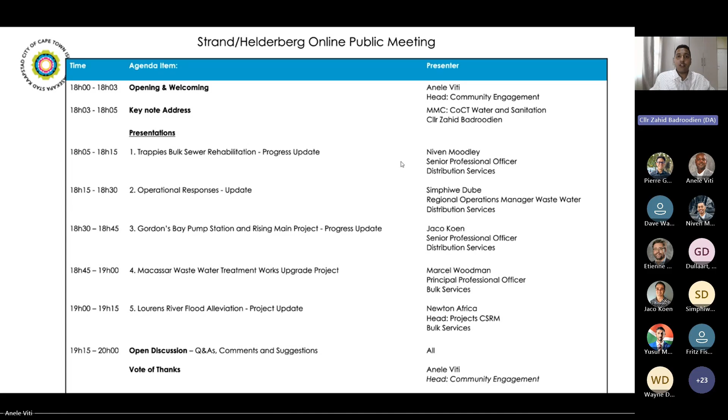Thank you, Councillor, thank you so much for that. If I may hand over now to Niven to present the first item. Niven, I will navigate the presentation from my side, you must just tell me when to move on to the next slide. You may take the floor. Over to you, Niven. Thank you, Anele. Anele, if I can just take control from my side, then I can navigate and don't have to keep asking you to skip slides. No problem, Niven, you can do so. Sure, can you please take us through to the presentation, or put it in presentation mode? Perfect.

Good afternoon, everyone. My name is Niven Moodley. I'm a senior professional officer in the Distribution Services Department. I am the project manager for the Trappies bulk sewer rehabilitation, and tonight I'll be providing you with a project progress update on this particular program.

For those who are not familiar, this is the overview of the Trappies line. It is the DN 900 line, a 900 millimeter diameter line that runs from the corner of De Villiers and De Villiers Street and Main Road, traverses down Bear Street, crosses Fagan Street and the Lourens River, and all the way down to the Lourens River pump station. We are in the process of rehabilitating this line due to the historical collapses that have occurred in past years.

Just for some further context and a project overview: the aim of this project is to emphasize that the Trappies bulk sewer is currently 50 years old as of 2025. The aim is to extend the lifespan of the pipeline for another 50 years and to restore the structural integrity of this bulk sewer to prevent future collapses along the line.

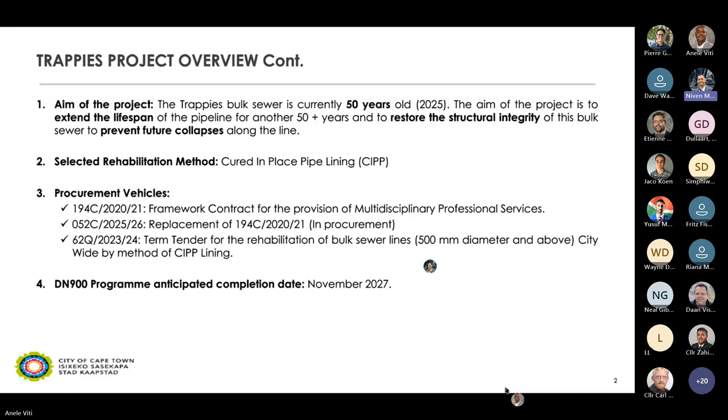In terms of overall progress to date, our professional services provider managing the construction was appointed for 7.3 million, and to date they have spent approximately 5.1 million.

We have 3 works projects. Works Project 1, initially valued at 32.2 million, has since spent 30.9 million. Works Project 2, valued at 34.5 million, has spent 10.6 million to date. Works Project 3, the latest, started this year at 34.6 million, with no expenditure to date, expected to ramp up as the months go by.

The upcoming appointments, or remaining works projects envisaged for complete rehabilitation of the sewer pipeline, will be Works Projects 4, 5, and possibly 6.

Okay Anele, I'm trying to change the slide. It's not moving.

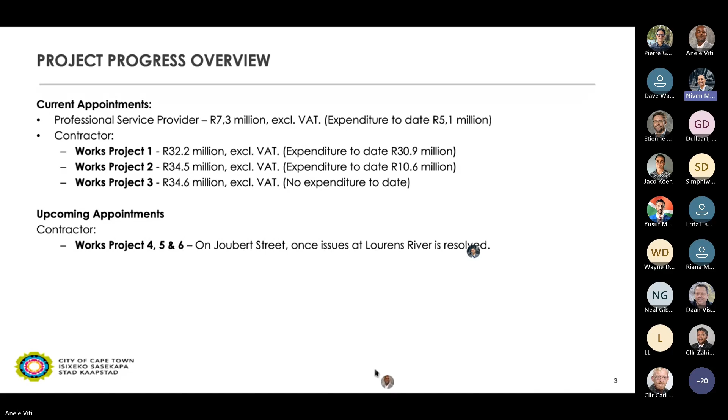Moving on to project progress, focusing specifically on Works Project 1. We last reported in December that lining was complete and the contractor had minor reinstatement works left for January 2026. I can confirm this has all been completed and De Villiers Street has been reopened. The completion date for this works project was the 21st of January 2026.

Anele, I'm not sure how we got to Works Project 2. If we can go back a few slides. Yeah, one more. Yeah, this is it.

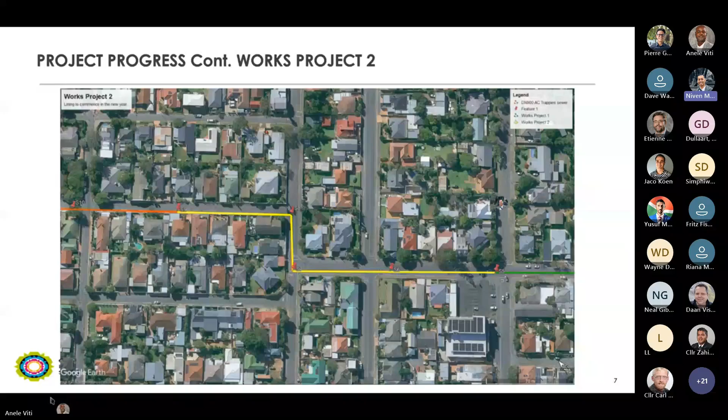Moving on to Works Project 2, which covers manholes S5 to S9, highlighted in yellow on this slide. It runs from the OK supermarket down the remainder of De Villiers Street, up Munich Street, until the beginning of Helderberg Street. I'll go on to the overview in terms of progress on Works Project 2.

The due completion date for this works project is 16th of May 2026. The contractor is making relatively good progress, primarily due to the absence of any failures on the existing pipeline, as opposed to the 4 failures we had on Works Project 1.

Works completed to date include the design and order of the CIPP liner, manufacture of the liner, and installation of the overpumping pipes in the roadway, specifically at Helderberg Street. We received delivery of the liner on December 11th last year. The contractor, upon his return, has since set up his temporary overpumping, isolated the pipeline between manholes 5 and 9, and done his pre-cleaning, CCTV inspections and profiling.

On the 10th and 12th of February respectively, the contractor completed the lining from manholes S5 to S6 and manholes S6 to S7. This is 50% completion of lining on this works project, and marks the milestone of the entire De Villiers Street being lined 100%.

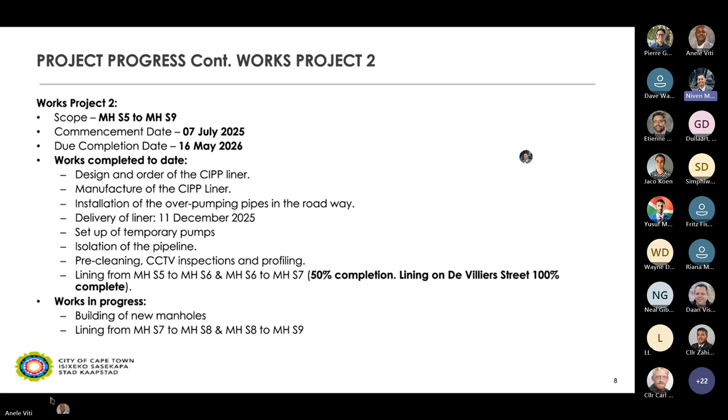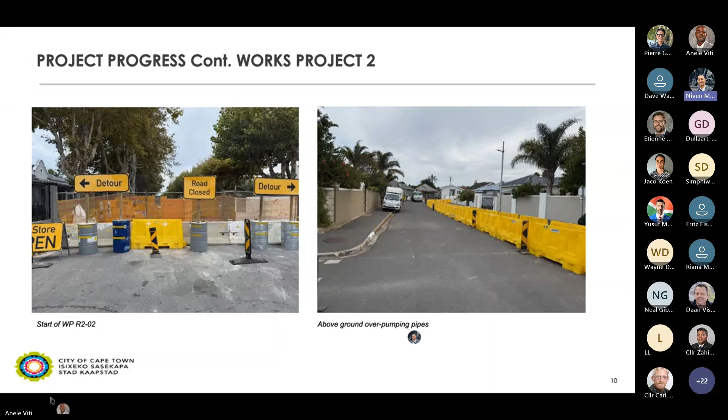The next picture here is the start of Works Project 2 on De Villiers Street. And then the picture after that is the above ground overpumping pipes that have been barricaded using New Jersey barriers on De Villiers Street.

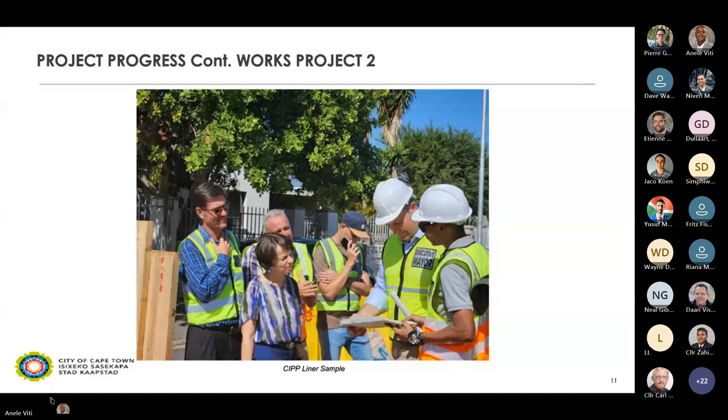Okay, moving on to Works Project 3. We did go into detail on the particulars of the challenges at the Lourens River in the previous community meeting. For those who weren't there, there's an alignment issue on a new bypass pipeline that was constructed in between 2022 and 2023, which has contributed to a lot of the surcharges and challenges we've been having upstream of Trappies.

As a result, we've shifted focus down to this particular area to remedy these issues so that when we do come back and finish Joubert Street, we're not going to have a lot of issues in terms of surcharges and spillages. So the city has initiated this project in January this year, as promised in the December meeting last year. We did get all the required emergency environmental approvals, and the contractor is currently on site. He has been appointed as of the 4th of February, basically at the beginning of this month.

Okay, so I've basically covered most of this already. Just to note that the due completion date for this works project is November 2026. That is worst case scenario. Best case scenario will be a lot sooner than that.

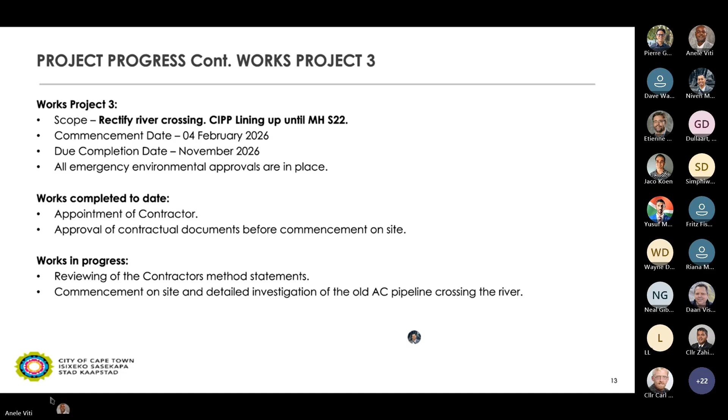Okay, this is basically a progress overview. The green section is Works Project 1, which has been completed. The balance of that between manhole S5 and S7 has been completed. So that first section of yellow and the entire green has been completed. The contractor now has to finalize his CIPP work from S7 to S9. That will be done by April, best case scenario, and May, ideal case.

And subsequently, or concurrently, we are working in the magenta area at the Lourens River to remedy the issues underneath the river so that we can promote better flow in the Trappies line and minimize any sewer spills and surcharges.

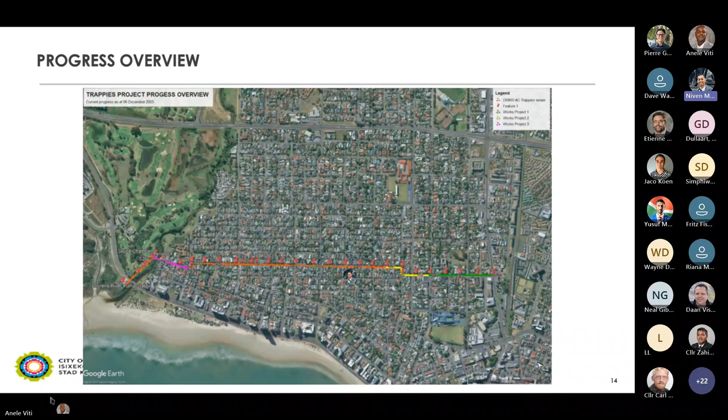Once we do rectify the issues at the Lourens River, we will then initiate Works Project 4, which will start from manhole S9, proceeding along Joubert Street, and we will put out works projects sequentially thereafter.

Okay, then moving on to general considerations. These works projects will not address the resurfacing of De Villiers Street and Joubert Street in its entirety. The contractor will only reinstate sections of the road that was affected during the works. To date, we have completed 530 meters out of the total 2,300 meters.

Challenges in terms of the surcharges along the line are anticipated to subside once the crossing at the Lourens River is reinstated under Works Project 3. Notices to residents have been issued to affected residents with the particulars of the overpumping on Works Project 2 and 3. We have reissued notices in January for Works Project 2, and we've recently issued notices just informing on the project for Works Project 3. Further notice will be issued once the contractor is fully established on site and he starts with his overpumping.

Then moving on to point E, as we progress with the third project, more sections of the pipeline will be thoroughly cleaned, where built-up silt and debris will be completely removed. This will gain back the original capacity of the pipe, which was lost over time. And then lastly, the contractor will return to complete Joubert Street once the issues at the Lourens River crossing are remedied.

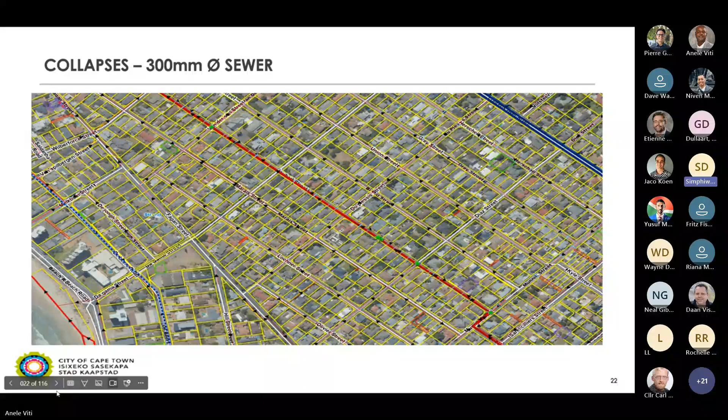On this slide we once again remind residents of the 4 collapses that had been completed by the time of our previous engagement: the collapse at 22 Joubert, the 2 collapses at number 32, and the one at number 78 Joubert. There was one outstanding repair at the corner of Munnik and Joubert Streets, which we committed to complete during the festive period. The photo on the slide was taken during the construction activities, and more photos will follow in the following slides.

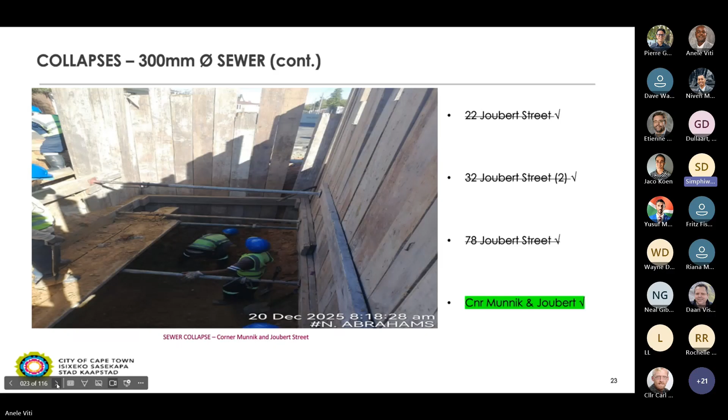These are 2 additional images showing, on the left, the completed reinstatement that was in progress once the pipeline was fixed, and on the right, an indication of the shoring work constructed by the contractor.

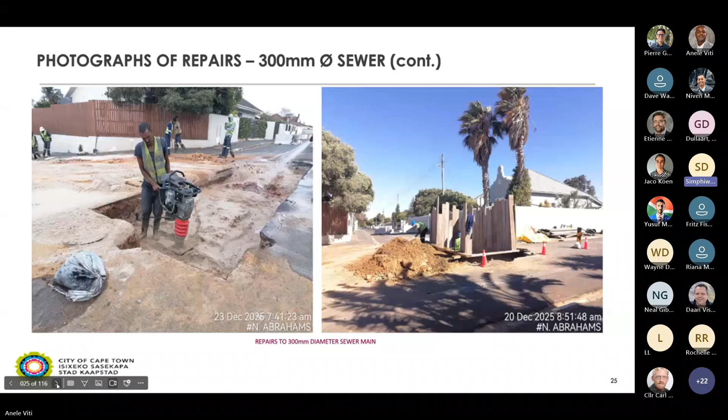This section of the presentation will focus on the capital rehabilitation works projects awarded in the Strand area, because one of the commitments we undertook in the previous engagement was to look at rehabilitating the local sewers draining into the Trappies bulk sewer line. We've been able to fast track the implementation of these projects, and the next few slides will show the awarded capital projects within the Strand area around the Trappies bulk sewer line.

4 works projects have been awarded to a contractor that will be commencing over the next 2 to 3 weeks on site, currently complying with contractual requirements and getting documentation in order. The first works project will rehabilitate 1,200 meters of the 150 millimeter diameter sewers around the Trappies bulk sewer line, and most importantly will address the 300 millimeter diameter sewer line I referred to earlier, where we had quite a few collapses between June and December last year. A total of 3 kilometers will be rehabilitated with an investment of 6.4 million rand. I'll make reference to the streets as we present the layout of the project.

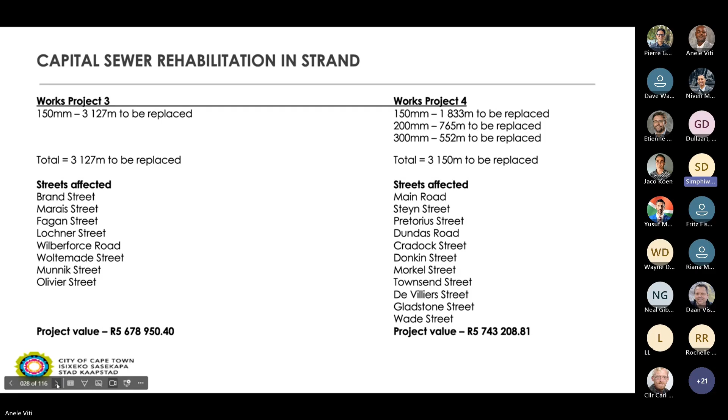Works project 3 looks at rehabilitating the 150s, or the local network, around the bulk sewer line with an investment of 5.6 million rand. Lastly, works project 4 will rehabilitate the section of 300 millimeter diameter sewer line running on De Villiers Street, closing the loop of the 300 millimeter diameter sewer, with an investment of 5.7 million rand. Now we're going to the layouts of the sewers that will be rehabilitated.

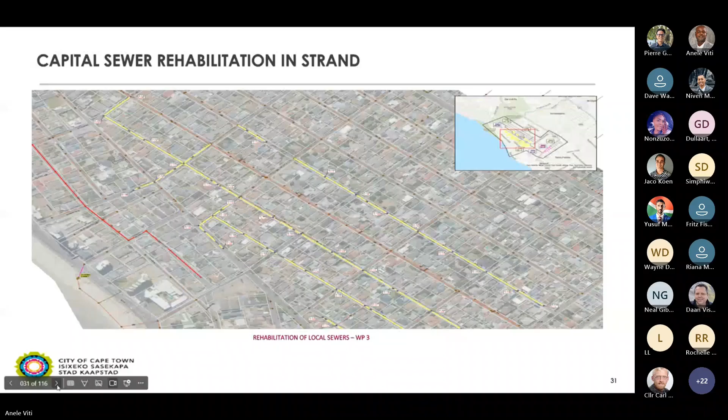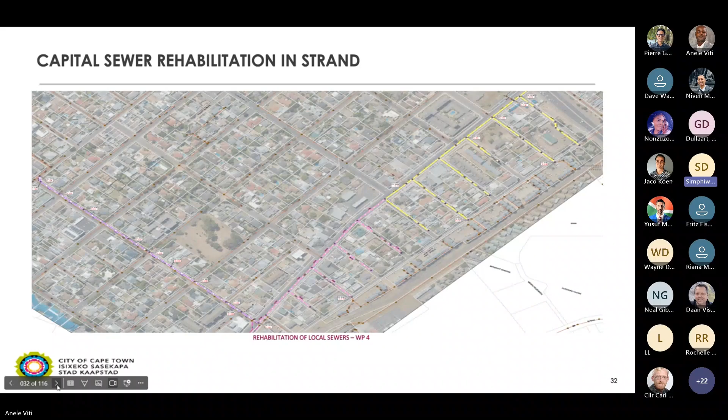The last layout shows Works Project 4. Most importantly, with this project we will be closing the loop by rehabilitating the 300 millimeter diameter sewer in De Villiers Street specifically. We'll also rehabilitate the 150 millimeter diameter sewers indicated in yellow in the top right corner, and toward the middle of the slide, the 200 millimeter diameter sewers that will be rehabilitated. Lastly, the purple line indicates the 300 millimeter diameter sewer that will be rehabilitated as well.

Next, I'll indicate the planned capital sewer rehabilitation projects section. The previous section covered the awarded projects; this section covers the planned projects in the Greater Helderberg area that we will be advertising next week.

The two most important planned projects worth mentioning are the Geelsloot rehabilitation of sewers in and around the Geelsloot, as well as the Heldervue project. For the Geelsloot project, we are looking to rehabilitate the 150, 225, and 300 millimeter diameter sewers in and around the Geelsloot, particularly to deal with root ingress as well as perceived structural defects of the sewer line, envisaged as an investment of 7.5 million rand.

We will be advertising next week and will rely on contractors to accept the works. The next project is the Heldervue project; there will be layouts to follow indicating exact areas where the projects will be rolled out. This project will rehabilitate 3.3 kilometers of 150 millimeter diameter sewers, where we were experiencing significant collapses, with an investment of about 7.3 million rand. These two projects together are just under 15 million rand, and the projects already awarded are worth just under 24 million rand.

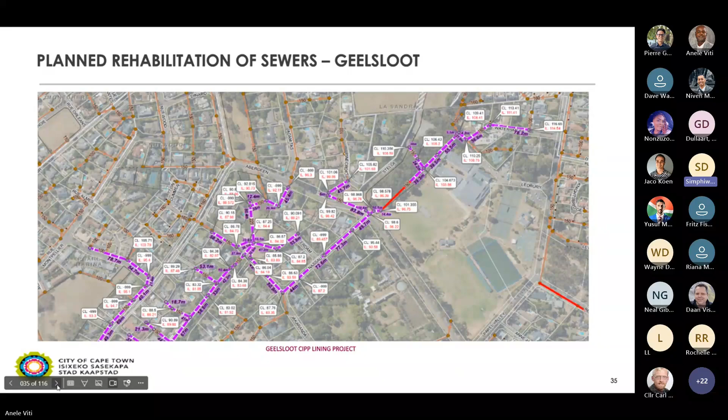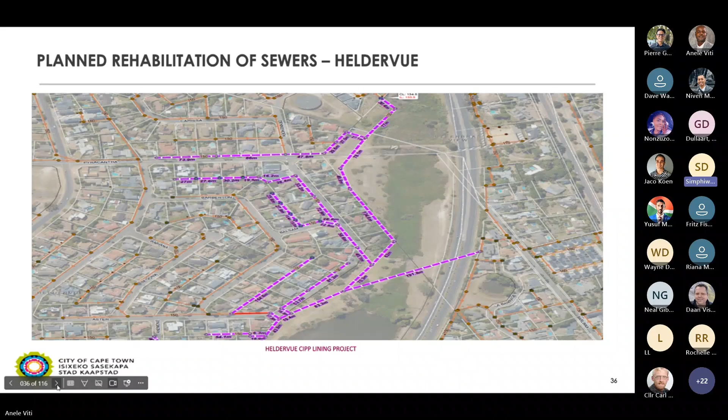As committed in the previous engagement, we had a successful summer readiness program where we proactively cleaned the sewers to reduce the number of complaints and infrastructural defects experienced. Heading into winter, we'll ramp up the proactive maintenance to ensure the network is ready for the additional inflows commonly experienced with high rainfall in winter.

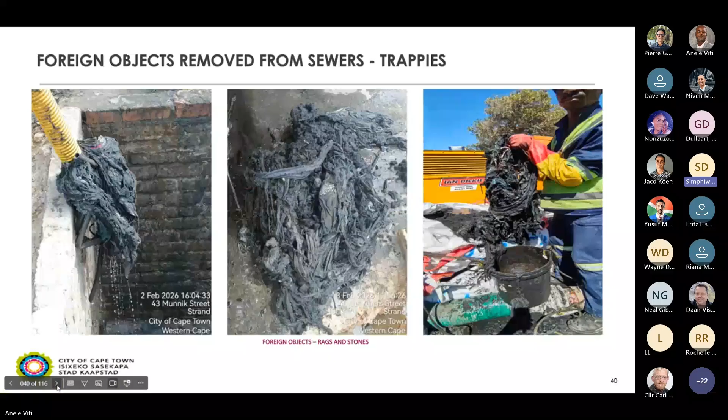Please just move on, Chair. I think it's the last slide. Yes, then just before that.

Lastly, this slide indicates some of the reporting channels that residents can use to log sewer-related faults. We encourage residents to log sewer-related incidents as soon as possible so our teams can respond accordingly and so we have a record of where rehabilitation or other responses are required. Thank you very much, Chair. I think this is the last slide of the presentation.

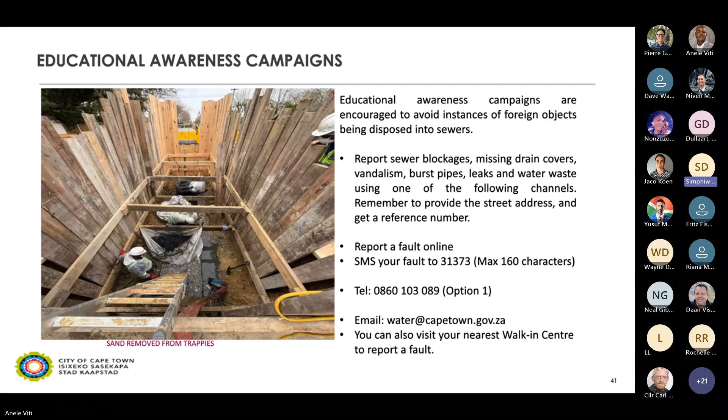Thank you, Chair. Good evening, colleagues, councillors, community members and residents. My name is Jaco Koen, Senior Professional Officer within the Distribution Services Department in Water and Sanitation. My primary focus for this meeting is presenting the progress on the Gordons Bay sewer pump station and rising main. Next slide, Chair.

For those not intricately involved in previous meetings, a brief overview of the scope of works: currently the Gordons Bay Wastewater Treatment Works is capped at a treatment capacity of about 3 megalitres per day. It's not sensible in terms of the city's operations to maintain a smaller plant, so it was more beneficial to look at upgrades at Macassar to accommodate additional capacity. Marcel will provide an update on that project later on.

So the scope of this project is to convey additional flow over and above the 3 megalitre per day capacity, away from the Trappies sewer where it's currently overflowing, into a new rising main which discharges into the Lowry Pass outfall sewer. In terms of the overview, the pump station is a 650 litre per second regional pump station with a 7.5 kilometer rising main, discharging into the 900 diameter section of the Lowry Pass outfall sewer. This relieves overflows from the Gordons Bay catchment to Trappies.

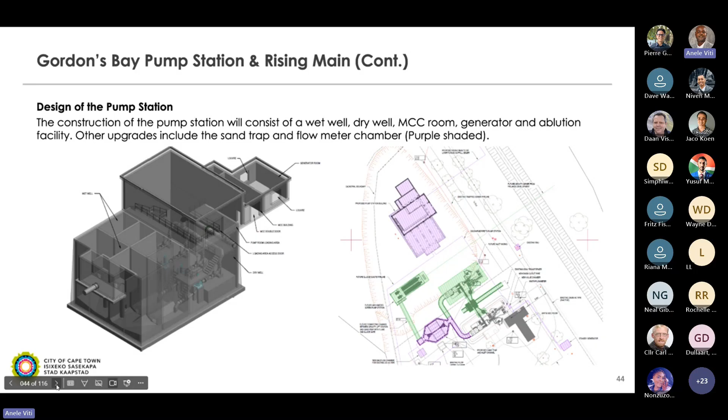Okay, then in terms of the pipeline, as part of this project we are constructing a 7.5 kilometer, 700 millimeter diameter pipeline, traversing the flow all the way from the Gordons Bay Wastewater Treatment Works into the Lowry Pass outfall sewer. This pipeline, for the first 2 kilometers or so, is in a rural or urban area at the moment. Then we turn 90 degrees into Circle Drive.

A large portion of the pipeline is being installed along Broadway Boulevard. Then we turn right, we just cross Altina. Then we turn right into Drostdy and Boschendal. We drilled underneath the railway into Arnold Street. Then it's crossing across Main Road into the Strand High School along their boundary. It goes then the last section over Mills and into Algoa, where it will terminate at the corner of Algoa and Reiter Street.

In terms of the coloring on the slide, the red sections indicate what has been installed to date. We'll get to the progress a little bit later, but about 6.5 kilometers of the 7.5 kilometers have been installed.

There's currently 5 pipeline teams on site busy with the installation, and one of them is the shoring team, which is in close proximity of the crossing in Broadway and Altina.

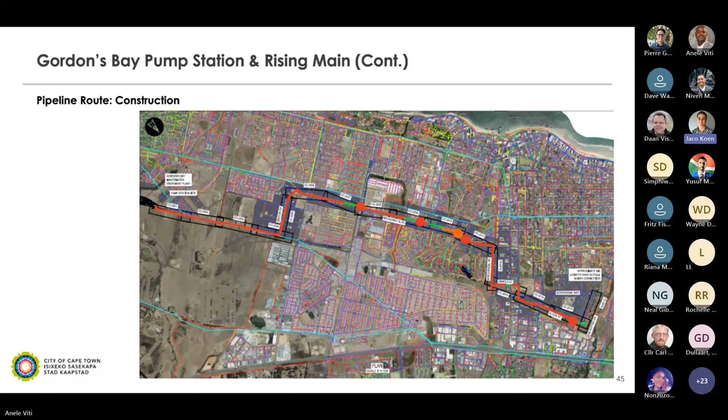Next slide, please. So a couple of challenges we experienced, unfortunately, which has halted our progress. The photo on the left, we have been experiencing delays due to the excessive amount of hard rock excavation. It's been on two fronts, both the pump station and the pipeline, which has been challenging, but the contractor is dealing with that at the moment, and we are aligning or shifting resources to tackle or mitigate any delays this might pose.

Then the photo in the middle of the slide indicates a lot of the existing services that we need to cross with the pipeline. Challenging conditions, obviously accommodating all of this within the working space or trench. So we're dealing with that risk as well.

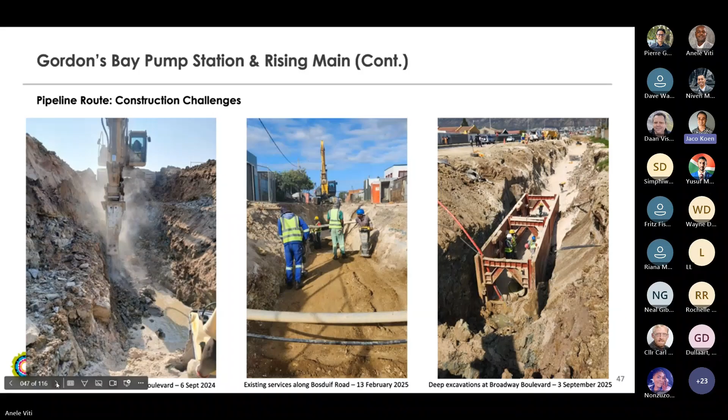And then lastly, the photo on the right just indicates a drag box, which is currently being used by the contractor in the deeper excavations. Some of these excavations range up to 5 meters deep. Thank you, Chair. Next slide.

Then in terms of road reinstatement, there's a couple of roads that's part of this project scope for reinstatement once the pipeline has been installed and tested. The first one being Drostdy Road. So the road reinstatement commenced end of last year. The road layers G9 to G3 have all been installed, followed by the asphalt on the half width. Then the following or adjacent half width of the road will also be rehabilitated as part of this project. That comprises a G3 and asphalt layer, and we anticipate that will be completed by March 2026.

The contractor has also commenced with the reinstatement of Bosduif and Sercor Road. This is quite a long stretch of road that we are busy with the reinstatement. The G9 and G7 is about 43% complete. G5 and G3 is installed at about 17% complete, again half width. 100 meters of asphalt has been installed as well, and then estimated completion for this road is between March and April 2026.

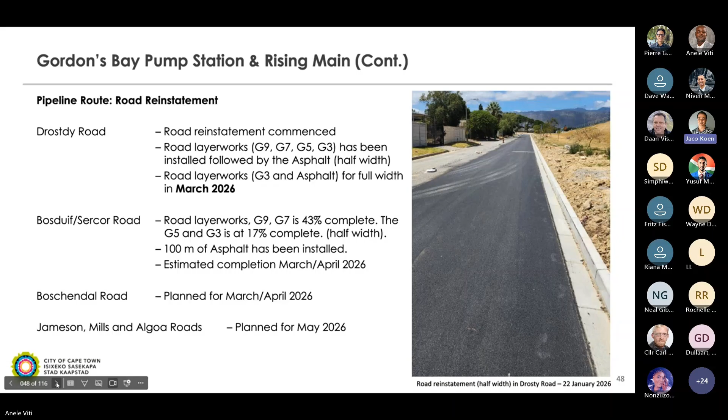Then with regards to Boschendal Road, the reinstatement is planned to commence between March and April 2026. Lastly, Jameson, Mills and Algoa is also planned to commence within May 2026. Obviously, a lot of this is dependent on the contractor passing the pressure test for the pipeline, so just to take that into account. Thank you, Chair. Next slide.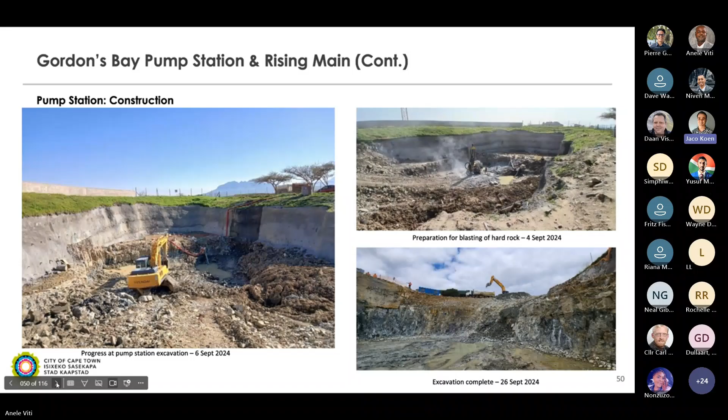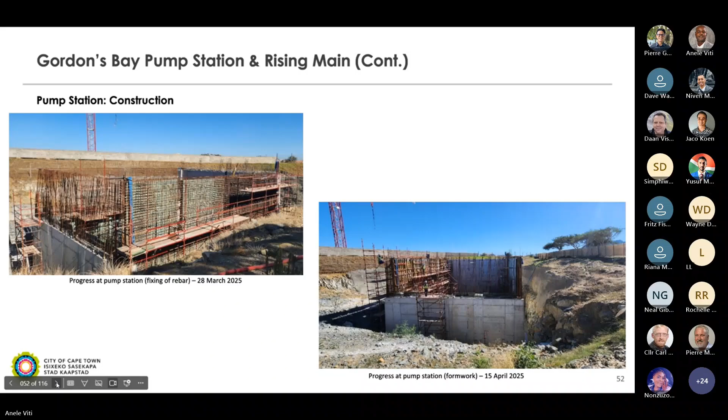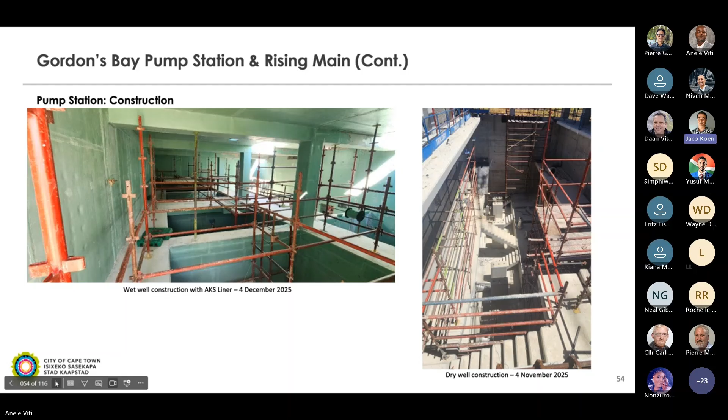Then we get into the more interesting photos. The photo on the left is as you enter the wet well - essentially where all the sewage will accumulate and enter the pump station. We can see the four pump bays or pump sumps closest to us, with diversion chambers at the back. The green on the walls is an AKS liner protecting the structure from corrosion attack from H2S gas. On the right, we have a photo of the construction of the dry well, dated November 2025, and there are a couple of more recent photos showing latest progress.

These are some of the more recent photos. The photo on the left shows the superstructure with most of the brickwork installed and scaffolding around the roof being constructed. The photo on the right shows the installation of the pumps, non-return valves, isolation valves, delivery pipework up into the manifold, as well as the flow meter and isolation valve. It's quite a big milestone that we achieved with the mechanical installation having commenced.

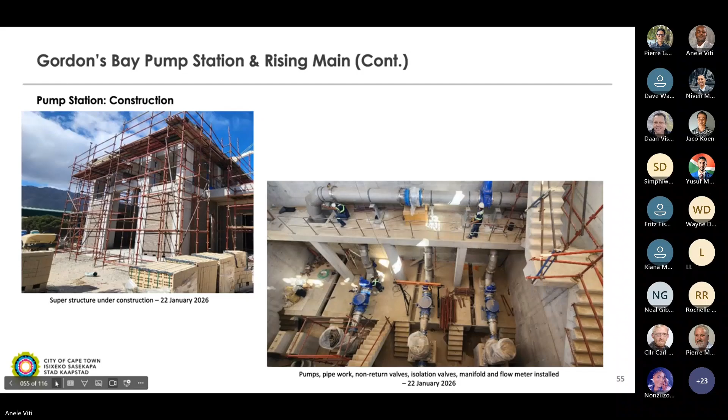In terms of project progress and appointments, the service provider or consultant has been appointed for a total of 28.5 million for consulting services, with expenditure to date of 16.8 million. In terms of the contractor, the construction contract was awarded at 248.8 million, or 249 million, with expenditure to date of 175.5 million. Clearly this project is currently in the execution phase. Construction commenced on site in March 2024, with estimated project completion in June 2026, which is the commissioning of the pump station. At the moment the construction phase is about 80% complete.

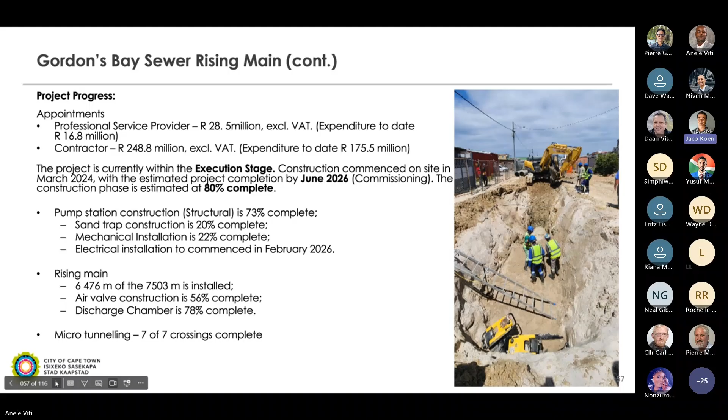In terms of air valve construction, 56% complete. The discharge chamber is 78% complete. In terms of the micro tunneling for the river and big road or the road crossings, those have all been completed. And that is it, Anele.

I thought I'd introduce the presentation and highlight three areas of the project I'll be touching on today. The purpose is to give a brief overview of the Macassar Wastewater Treatment Plant, including its history, the problems we've experienced, the core functions of a wastewater treatment plant, and the upgrade taking place. Secondly, I'll touch on the timelines for the project, including the civil and the mechanical and electrical works. Lastly, I'll take you through some of the progress photos to date.

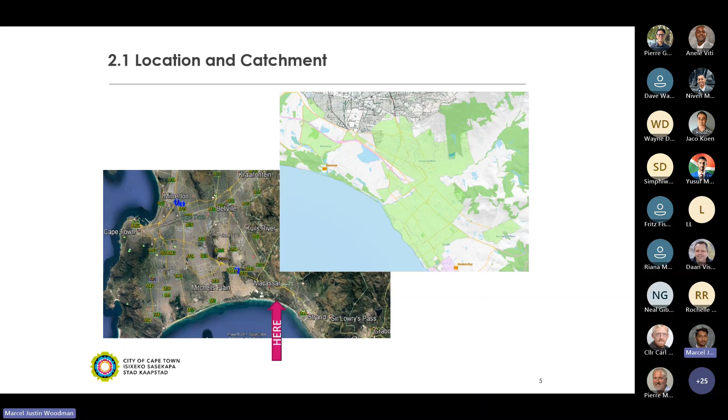Just to give some background, the existing Macassar works is located between Khayelitsha and Strand. This is effectively along the False Bay coastline, approximately half a kilometer south of the Macassar suburb. It's located near the Eerste River estuary, actually at the estuary itself. On the right, you can see highlighted in green the catchment area which Macassar services: Macassar, Gordons Bay, Strand, and Somerset West.

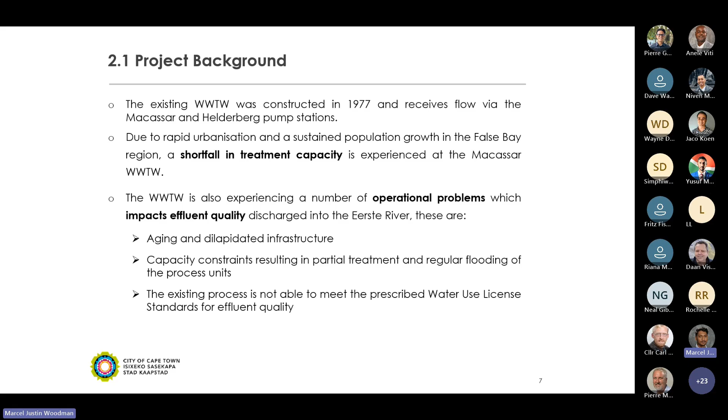Continuing with the project background, as I mentioned, it was originally constructed in 1977. Why are we doing this upgrade now? Essentially, the catchment has reached rapid growth, and a moratorium was placed on all development in the catchment, as the plant has reached the end of its useful effective life. The plant's experienced a number of operational issues, including capacity constraints, flooding, dilapidated infrastructure such as the inlet works, and an inability to meet water use license standards for effluent quality.

I thought I'd throw a few photos in here. As mentioned, the civil structures are reaching the end of their useful lifespan. Normally, civil structures have a useful lifespan of 50 years, and we can see that these structures have surpassed that threshold. It's not great to see, but these photos highlight the extensive degradation of the process units and the compromised structural integrity. We've got the raw intake chamber on the left, the inlet works towards the top right, and some ponding that has been occurring at Macassar.

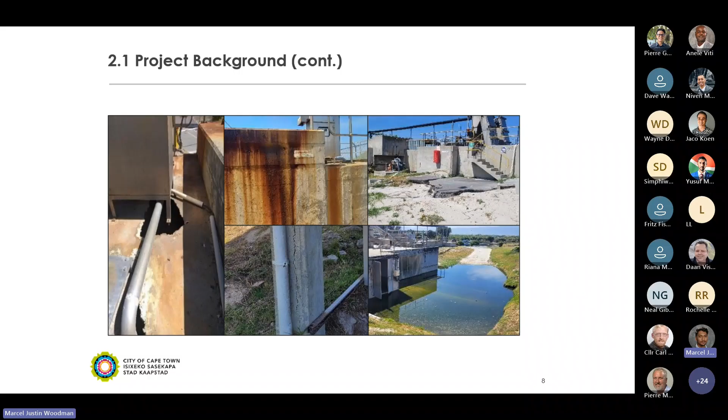Again, I've added some photos of the dilapidated mechanical equipment. Screens and pumps are basically seen in these photos. They normally have a useful lifespan of 15 years, and most of the equipment in the photos has been installed in the early 2000s. Here's just a shocking photo of some operational problems we can see.

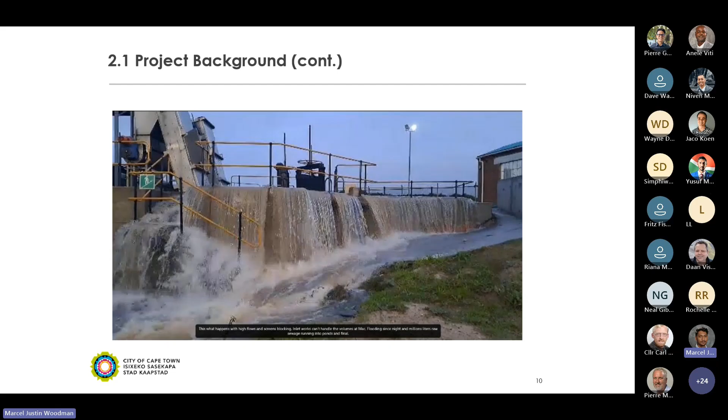This is the inlet works. It basically cannot handle surges in flow and causes flooding of the site during peak flows. We've got some more pictures here highlighting flooding of the inlet works and the splitter boxes, and spillages in the SST areas during peak flows.

So now that I've given you a picture of what the plant was like, I'd like to explain why the upgrade is of such importance. And after leaving you with such shocking photos, we can get to the positive side of this presentation.

So what is this plant trying to achieve? We're trying to achieve a capacity increase from 32 megaliters to 80 megaliters per day. The population equivalent served from this upgrade is about 320,000 people, and the investment scale of the project is 4.7 billion rand.

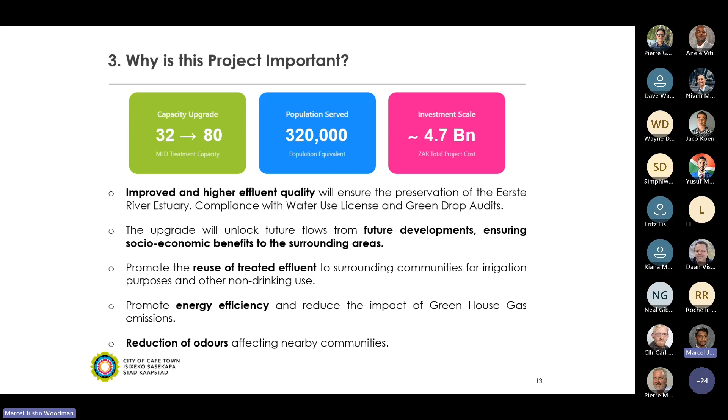Once complete, the plant will have the ability to comply with the water use license discharge limits to the Eerste River. One notable aspect of the project is that it promotes green energy efficiency and reduction in greenhouse gases, which I'll get into later. It also promotes reduction of nuisance odors, and technology standardization across all of the City of Cape Town wastewater treatment works. Let me take you through some of the basics of wastewater treatment before I get into what's to come over the next 5 years.

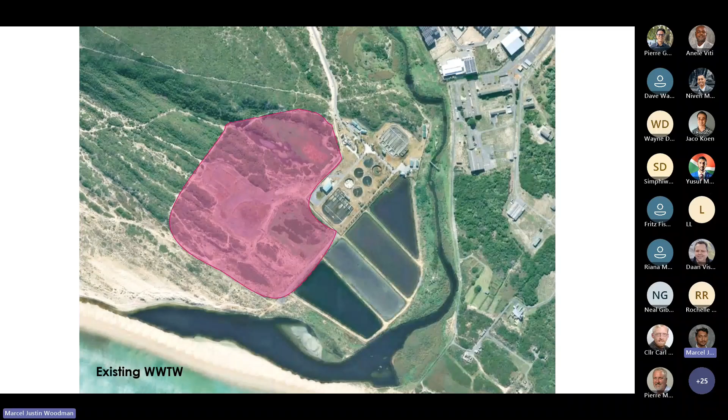Just for comparison of the existing wastewater treatment plant, the pink on the left is basically the expansion area that we can see, and I'll get into it in the next slide.

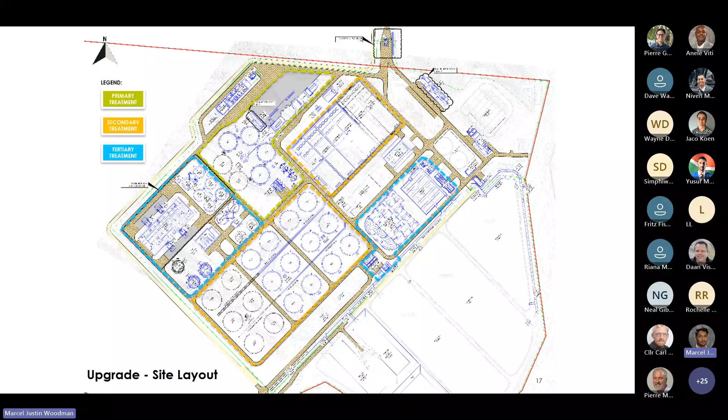I've just put in a layer of, visually, thought I'd provide a rendering of what the project will look like once complete. We have the sludge processes towards the bottom of the image, and then the settling and biological processes towards the top, and the inlet works towards the bottom left.

Going into, oh sorry, something popping up here. So now a mega project of this caliber can't be done overnight. It takes a substantial amount of resources to implement this upgrade, over a period of 5 years.

On the project, we have two contractors. It's the civil contractor, Stefanutti Stocks, under contract 203Q 2023-24. And then we've got a consortium who is the mechanical electrical contractor, comprising Paterson Candy International, Inenzo, and Devcotech in a consortium.

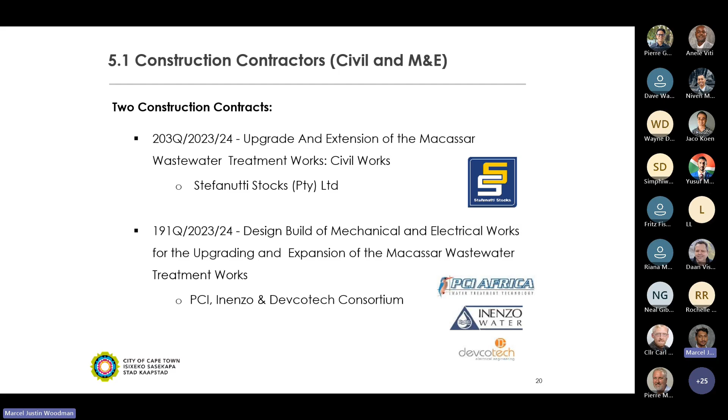That's 191Q 2023-24. Looking at the project timelines for the mechanical and electrical, with a value of about 2.2 billion rand excluding provisions of CPA, ROE and VAT, this is effectively a FIDIC yellow book contract, meaning it's a design-build. The construction has a duration of 54 months, starting 12th of December 2025 and ending 12th of May 2030, with a defects notification period of 12 months starting in May 2030 and ending in May 2031.

On the civil side, 203Q, the contract value is in the region of 1.35 billion, again excluding provisions of CPA and VAT, and it is a GCC contract suite. The construction period is also 54 months, starting 29th of September 2025 and ending 29th of March 2030, with the defects notification period starting in March 2030 and ending in March 2031.

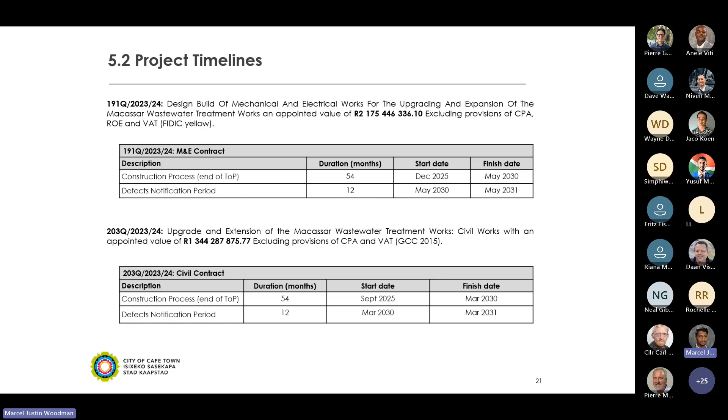So even though, okay, let me just see if I can hit play. Is it playing? Oh, yeah.

So even though the construction is still in its infant phases, I thought it would be great for everyone to see the scale of this project. It doesn't have the same effect seeing it on a drawing or rendering as shown previously. I'd like to highlight that the civil contractor is on site at the moment, while the mechanical and electrical team is currently finalizing designs and ordering equipment.

Just to note some other notable improvements of the plant which I didn't mention in the green, yellow, blue sections of the plant layout: we've got odor control and odor removal technology, various new pump stations and electrical buildings, a new process operations building, workshop, store and guardhouse, and improved site security.

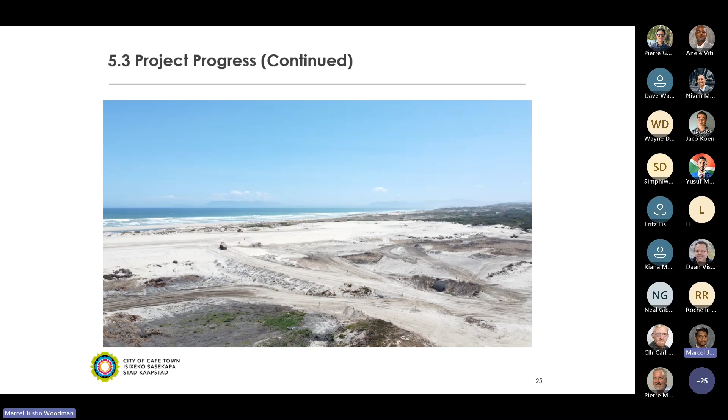Currently the civil contractor is busy with the earthworks, and that's in the far right corner, which will basically be the new sludge processes. If I go on, we've got more earthworks taking place over here, and this is basically in the expanded area where the earthworks are taking place.

I know this was a long presentation, so let me leave you with some of my closing thoughts. What can we take away from this? The project is critical for meeting current and future sanitation demands within the catchment area.

The project's also critical for future development within the Macassar catchment, triggering economic and socio-economic benefits with a positive long-term impact on surrounding communities. We also get higher effluent quality, ensuring the preservation of the Eerste River, which is vital for the livelihood of surrounding communities and the protection of the sensitive Eerste River estuary.

One of the most notable parts of the project is that we're promoting green energy, significantly reducing greenhouse gases, utilizing sludge, and doing this in a sustainable way, alleviating the load on the Eskom grid.

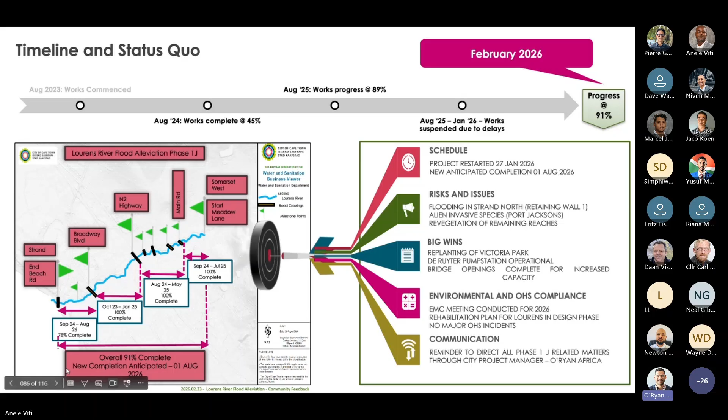On the next slide, I'll start on the challenges and the issues. So if we can move to the next slide, Nelly.

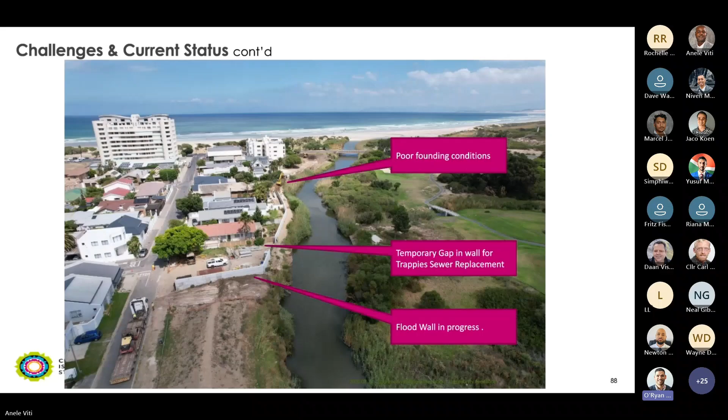Moving up to the next slide, moving up in the catchment. I think we skipped a slide. Just check if we go one back. Okay, you can move forward, it's fine.

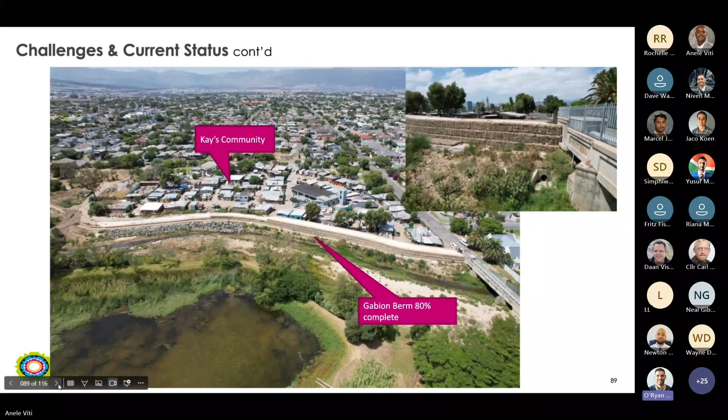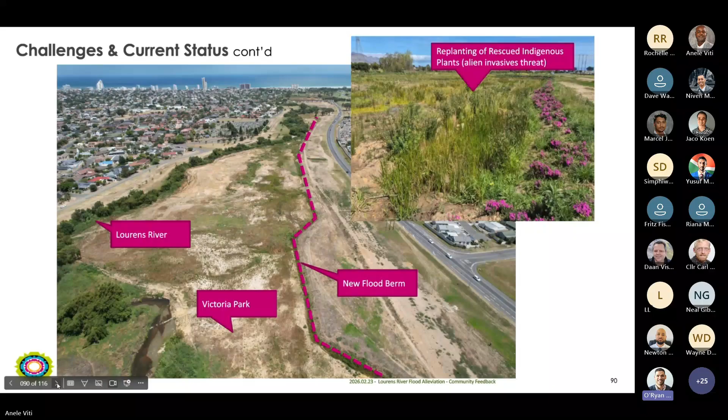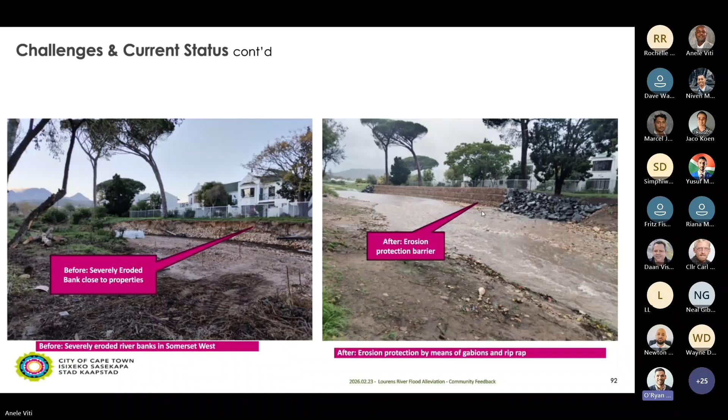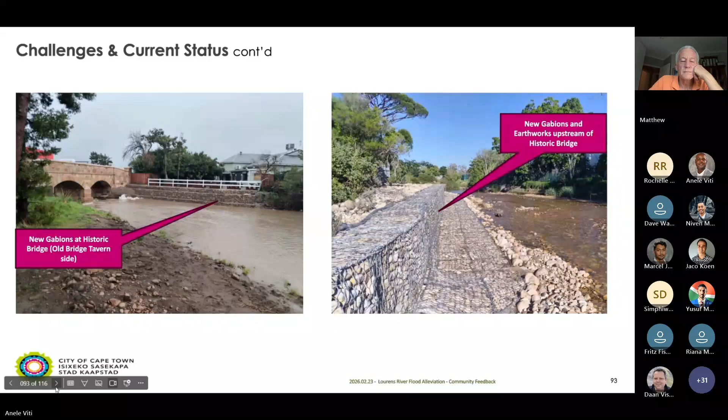In closing, the Lourens River Flood Alleviation 1J project is the last of the smaller projects done in the catchment, and this is basically priming the catchment to get ready for the future Lourens River projects, which will address the bigger return periods. There's about 6 months left, and we're hoping to finish before 1 August. Thank you.

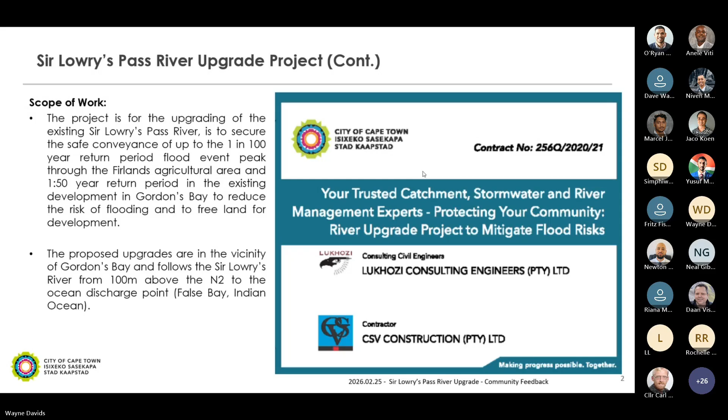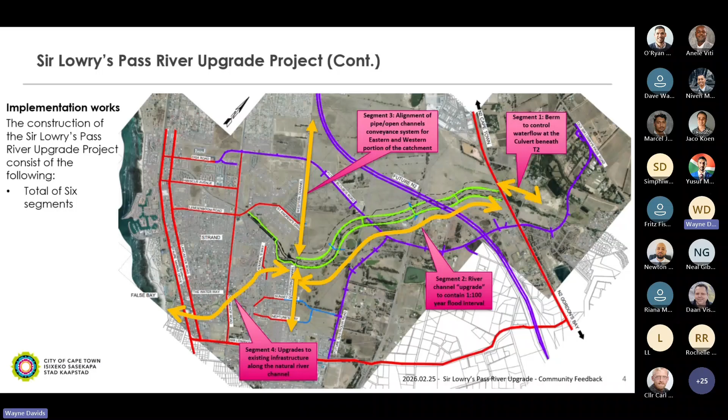Segment 4 is also part of the scope of works, to upgrade the original Sir Lowry's Pass River, which in a 100-year floodline will divert water of up to 25 cubic meters per second. Then also you have the modification of the Gordons Bay Wastewater Treatment Works. For segment 6, we have the upgrading of the existing diversion channel, where the embankments will be made wider to contain more stormwater runoff.

In the segments, you have your different drop structures A, B, C, and D. The drop structure is put in place to make the slope less steep than the existing one. The existing slope is actually 1%, whereby we reduce it, between each drop structure, to 0.5%. The reason we implemented the drop structure is to alleviate erosion, scouring, and sedimentation movement towards the wastewater treatment works.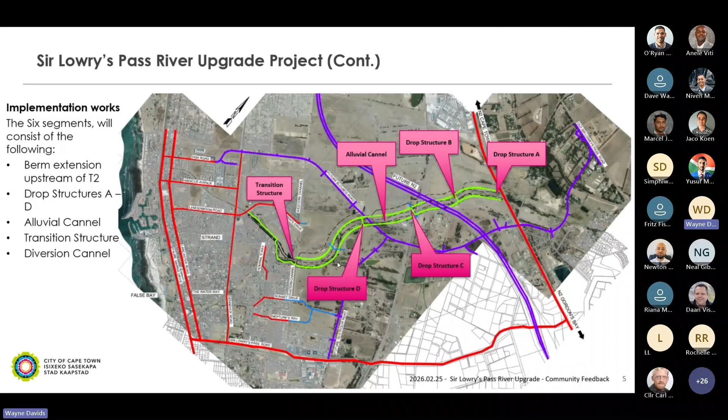We also have, as I explained, the alluvial channel, which is about 84 meters wide. If you stand on top of the embankments and look down towards the center line of the channel, it's about 4 meters in height. Then you have your transition structure, which we incorporated with a steeper slope so that we don't get sedimentation build-up from the original Lourens River natural channel to the concrete structure. And then we have the diversion channel.

These are some pictures taken last month, with the alluvial channel pictures on your left-hand side, and a cross-section showing what I explained, about 84 meters wide, and the height of the embankment on top to the center line of the channel, which is about 4 meters.

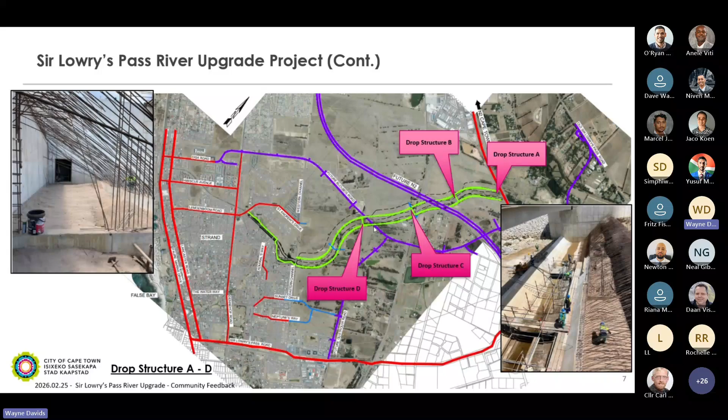Then you have your drop structures. These are pictures of drop structures with the bucket system, and you can see the rebar that they're busy building.

Then you have your transition structure, which from here is about 39 meters wide, and this one is 30 meters wide, with a slope of about 4%. We did this and included it because it transfers from a natural channel to concrete, where the bypass is all concrete. We put this in with the steeper slope so that we don't have sedimentation build-up like we did in the existing diversion channel. This is also just a cross-section showing the upstream side of the transition structure.

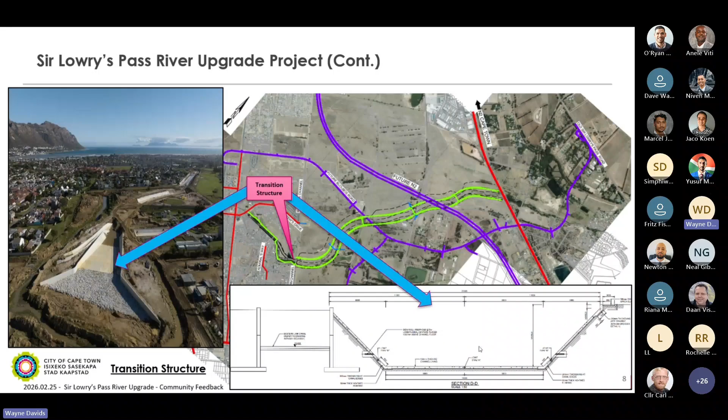Your diversion channel is between the transition structure, which is here, and the diversion structure channel. It's all done in concrete, which plays a good part in the design so that we don't have sedimentation build-up along the diversion channel.

This is just a plan view of a typical drop structure, drop structure D, where this side is upstream and looking down, this is downstream. This shows the flow, how the water will flow. You've got your wing walls that direct the water towards the bucket system, and from there it will go towards the bypass channel. Here you can see the bucket system, and this is part of the wing walls. For the wing walls in the drop structure itself, you won't be able to see the footing, but from the ground downwards to the footing, it's about 7 meters deep.

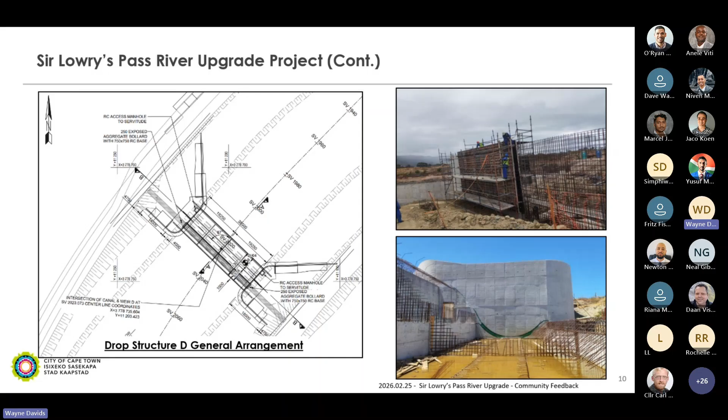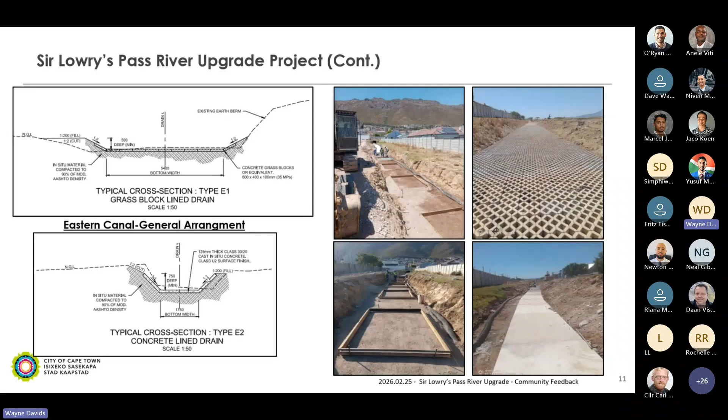This is again your western channel, moving from north toward the south, but it will go through the golf course because we didn't expect the western channel to go through the transition structure. That's why we made a low point where you've got your pump rising main, and behind it your sewer rising main. There's a channel that goes through the golf course and comes out to the diversion channel of the Lourens River again.

Hi Wayne, sorry to interrupt you my brother. Yes, we are way over time in terms of our presentation. Okay, so if you can just wrap up.

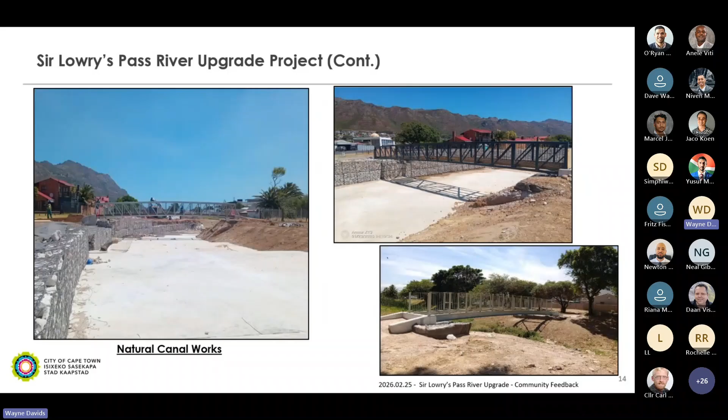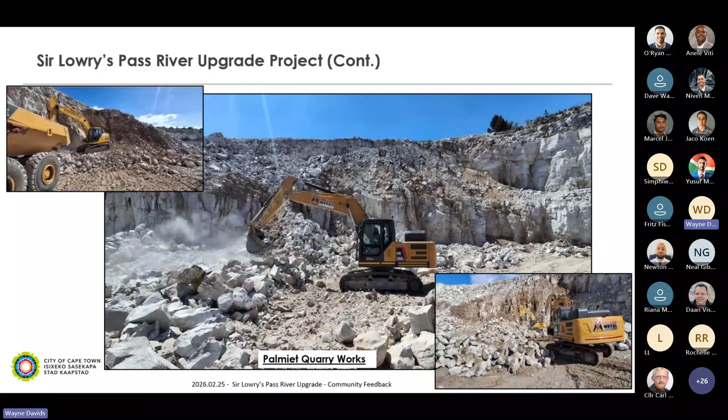Part of the scope is also to upgrade the sections of the natural regional channel. This is just where we get our riprap, type A, B, and C, and the maximum is up to 2 meters in diameter. That's the Palmiet quarry, towards the Grabouw side.

As Newton explained, we've appointed the professional service provider. To date we expended 8.5 million, and in the contract itself it was approved for 363 million, and to date we spent like 265 million. We allowed for 870 days, which is like 29 months for the project, but with the delays we went over, and the end date will be June 2027 due to delays.

Like Newton explained, the project is 70% completed. This is just your track record of how we spend, our spending as a percentage and so forth. We also comply with the EMPR and follow strict conditions. We test our water quality to see if it wasn't disturbed by the contractor itself. So far so good.